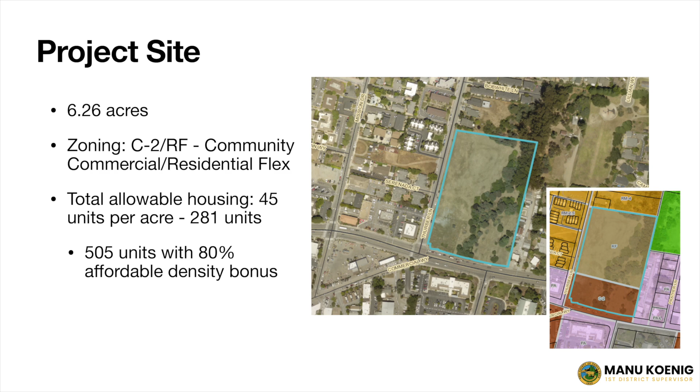It is not taking up Winkle Farm Park. You can see Winkle Farm Park off to the upper right. This property borders it roughly where the tree line is, and there's an urban arroyo that goes down the middle of the site that is roughly 2 acres.

The project's proposal includes 181 residential units, plus 2 managers units, for a total of 183. It includes 5 total buildings: 1 3-story building, 2 4-story buildings, and 2 5-story buildings, with renderings shown on the right. The project is proposed to be 100% affordable.

I can get into the complexity of what exactly that means, and there would be 273 parking spaces, or approximately 1.5 per unit.

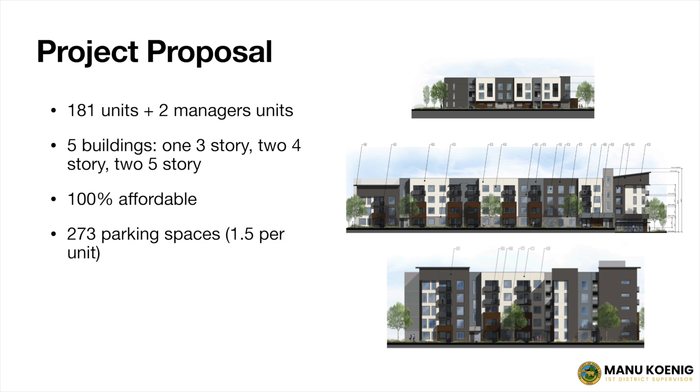The affordability calculations are a little complex. Basically, the project would be divided into 4 different income levels, all based on the area median income, which is about $105,000 per household.

So the project timeline so far, we actually do have more people than when this was first aired at a community meeting back on April 29th. The developer held a community meeting back then at the Congregational Church in Soquel. Saw many of you there.

The first formal plan submission to the county was actually very recently, on August 30th, and there were a few design changes between April and August. Then I started to hear from you at my office hours in September, so I started sending out communications September 13th to the Thurber Soquel Benson neighborhood, and then October 3rd to pretty much every email on my newsletter list, about 14,000 people. And here we are, October 10th at a community meeting.

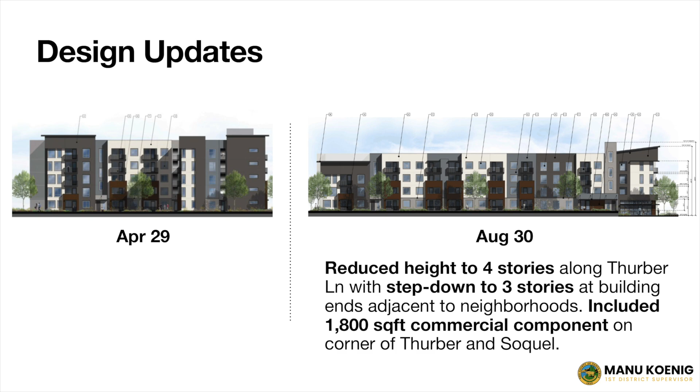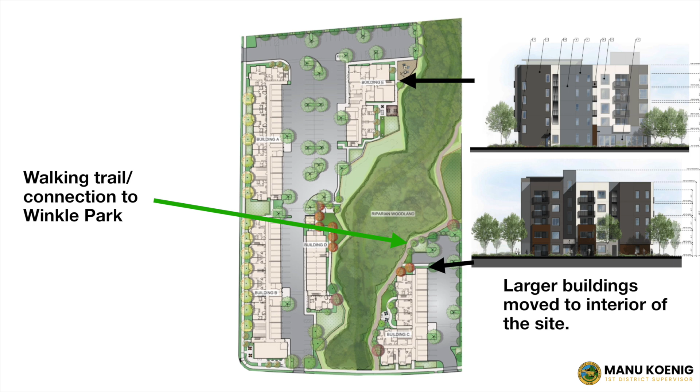Additionally, we're looking at putting in a walking trail connection to Winkle Park. The applicant and the county are talking about how we potentially do this, and who will ultimately manage this area, whether it's the county or the development itself. There are still 5-story buildings, as I mentioned, but they've been pushed more towards the internal part of the site so that they're not up against any particular existing buildings. They're also separated by parking lots from the edge of the site, again, to avoid excessive shadows or impact.

So those are some of the changes we've seen so far. I heard some snickers at adding a commercial space and a walking path, like it's no big deal. Why bother trying to integrate this project into the neighborhood? Well, I could say, look down the street. We've got a 9-acre affordable housing project there, and it's fenced off. If you're a member of the community, you don't get to interact with that 9 acres on Soquel at all. And so I would suggest that's not a particularly good way to have a project integrated into the neighborhood. So we can definitely do better than that.

So why are we even talking about projects of this size? Well, first let's review some of the basic numbers. You can't actually make this stuff up. I'm sure the idea of $3,000 a month for a 3-bedroom sounds high. The reality is the average rent in our community is $4,000 for a 2-bedroom.

Santa Cruz County has been named the least affordable housing market in the entire country 2 years in a row. We were just ahead of San Francisco a couple of years ago, and now we're a lot ahead of San Francisco. That means 70% of renters spend more than 30% of their gross income on rent. That's gross income compared to take-home pay. It's really more like they're spending more than half of all their take-home pay on rent.

The average home price in this neighborhood is $1.3 million. I'm sure if you just moved to the neighborhood, you feel that. And with a 20% down payment at today's interest rates, it would take a household income of over $400,000 to afford an average priced home in our community.

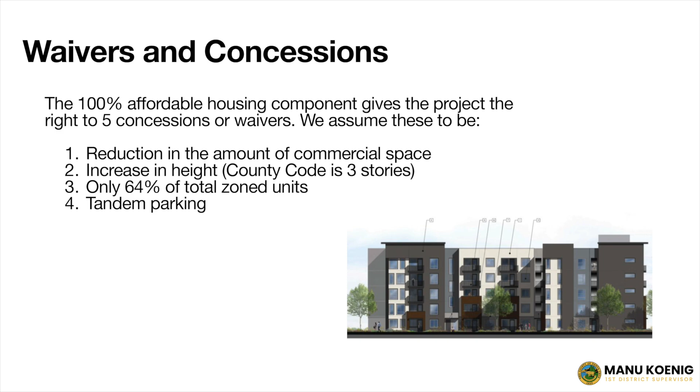So many of you said, let's just tell the state to pound sand - no way, we're not doing it. Sorry. Well, our City of Santa Cruz friends were a little bit ahead of us on this journey and tried that.

They tried that with the 831 Water Street project. This is at Water Street in North Branciforte. In October 2021, the Santa Cruz City Council rejected this project. They said, we don't like it. They found a couple of reasons, having to do with the stability of the slope and with the way the low-income units were distributed through these two buildings here. So they denied it.

A group called YIMBY threatened to sue them under state housing laws. Furthermore, the project reapplied under SB 35, that's the streamlining provision in state code, which basically reduces the amount of consideration the council could give it. So they ended up approving it just 2 months later.

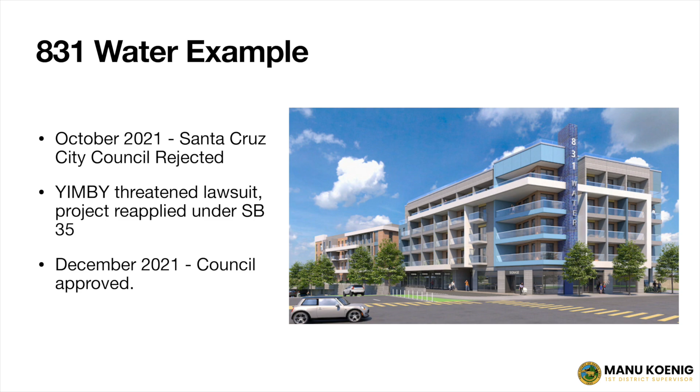Let's talk a little bit about why here, the RHNA allocations, how the zoning map is developed. A lot of you have reached out and said, we need housing in our community, but by all means, it's the wrong place. Put it downtown, put it in Santa Cruz, Capitola, Watsonville.

The reality is the state has said all of the above. Each one of us in a separate jurisdiction, the cities and the unincorporated county, we've all received allocations for the plan for new housing in the thousands.

City of Scotts Valley, 1,220 units they had a plan for. City of Santa Cruz, 3,736. Unincorporated Santa Cruz County, 4,634. City of Capitola, 1,336, which is significant because they only have about 10,000 houses. City of Watsonville, 2,053 units.

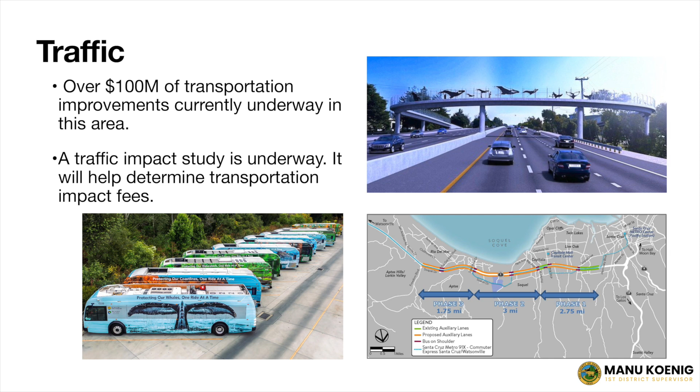That means building an auxiliary lane on Highway 1 so you'll be able to get on at the Soquel Drive exit and go all the way to 41st without ever exiting - you won't have to merge with existing traffic. And that project is being extended, as you've seen now - phase 2 down to State Park Drive is underway, and will be extended down to Freedom Boulevard, we hope. We're currently applying for money to build that segment through Aptos.

At the same time, we're going to work on Soquel Drive. Most of the impact you've seen right now is from the sidewalk gap closures - we just had a lot of holes in the sidewalk network, and those are being filled in. Sidewalks are extremely expensive, so we're happy for the state assistance - they're like $1 million a mile. We're also putting in buffered and protected bike lanes, green bike lanes on Soquel Drive to try to make it as safe as possible for people to ride.

Wherever possible, we're doing fully protected lanes with a barrier, the posts, and where the widths are just under regulation, we just have a foot or two of extra striping. We've also invested heavily in improving the bus network, and Soquel Drive is actually the best bus line in the county - it's most heavily used after the routes up to UCSC. That's why we're expanding to 15-minute service on Soquel Drive.

Now, one thing I truly believe will make a difference through this area is timed lights. We have a lot of lights really close together - Thurber, Winkle, Dover, Madison, and then you're at 41st. We're also looking at putting a right-hand turn lane from Soquel onto 41st. And the last stop sign on Soquel Drive at Robertson Road is being replaced with a stoplight so it can also be timed. They'll all actually know what the other one's doing, so they can all turn green at the same time and traffic can actually move.

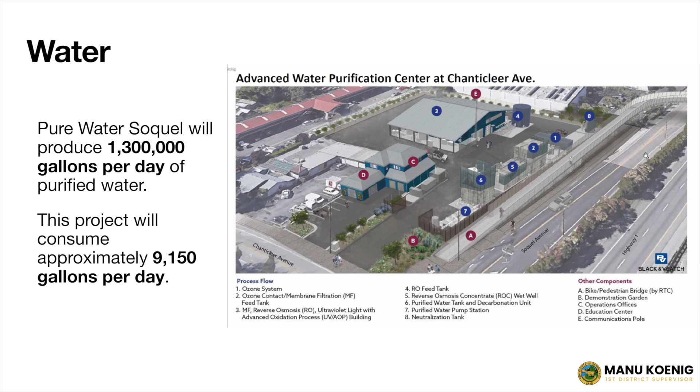And wait, there's more. Because when we had this discussion about water 10 years ago, the community said, first of all, we don't want desal, we'd rather see recycled water. That's what's happening. And furthermore, what about all that good water that flows out to the ocean in the winter when we have all that darn rain? Well, guess what? We're going to pump it into the aquifer too.

Santa Cruz Water Department and Soquel Creek, which basically rely all on surface water, San Lorenzo and the North Coast streams, have formed an agreement, interties everything with Soquel Creek Water District, which is all wells, pumping it all out of the ground, which is why we have a critically overdrafted basin here. They're now working together, and they're going to take the excess water in the winter and pump it into the ground for storage and use later.

And they are probably a year away from turning that on to production levels. They've done all the tests. We confirmed that the basin actually holds water when we pump water into it, that they can get it out effectively. And so between these two efforts, there is good reason to believe we'll have a stable water source going forward. We are also requiring monitoring of large wells throughout the county so that we know, particularly since some of the agriculture near the coast has aggravated this problem, and so we'll be keeping a closer eye on that.

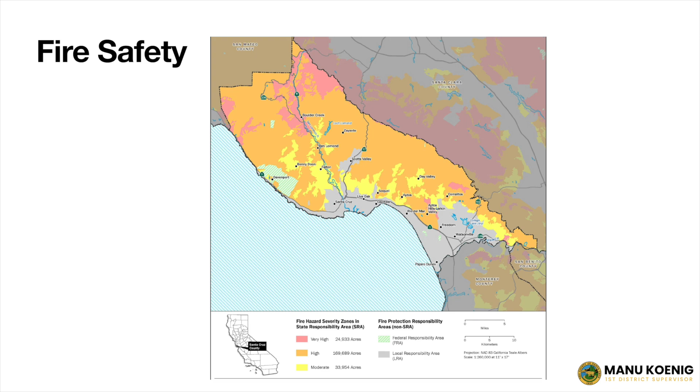So yes, there's a lot of fire risk out there, but this site that we're talking about is outside of it. Again, that's why sites like these in the urban area are the ones where we said, hey, if we have to put 4,634 units in this county, we should probably put them outside of severe fire zones.

I was asked, do we have enough capacity if Measure R fails and Central Fire doesn't get the money they're asking for? Would this project be denied? No. Measure R is about resilience for Central Fire. It's about getting Soquel Station out of the floodplain so they're capable of responding during disasters rather than being stuck in the station. It's about having larger stations that can hold more modern trucks. They do have enough equipment now, ladder trucks, to respond to a fire in a 5-story building.

Another question that came up is, will there be on-site security? I don't have a firm answer yet, but I imagine the 2 on-site managers would be considered the frontline defense there, and of course our sheriff's department. The sheriff's center is right across the highway.

5 stories above parking, so 6 stories in total. On 2.7 acres, 289 units, that's 107 units per acre. This project is 28.7 units per acre. They're not building over the green space, though they could—they could pipe that whole green space just as it's piped below Soquel Drive and up by Benson. You could pipe it and just build right over it.

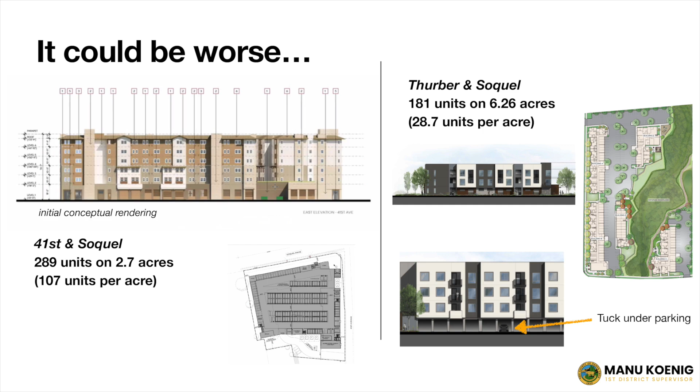Again, 500 plus units could potentially go on the site. So again, the current application has been deemed incomplete. We're still waiting for the traffic impact analysis, and we're still waiting for a review of the biotic report for the CEQA analysis, the Environmental Quality Act analysis. We don't expect a complete application until at least the end of the year, possibly later.

Once we have a complete application, this will go to the Planning Commission for a public hearing, and then if it's appealed, it would go to the Board of Supervisors, where I would vote on it. Now, even that—say it doesn't automatically go to the Board of Supervisors. 41st and Soquel is applying under a state law, ministerial approval process. Ministerial means no discretionary review required—not the Planning Commission, not the Board of Supervisors. If it meets the rules, it shall be approved.

Well, there is a point in having this meeting, and we're actually getting to it, which is—first of all, my commitment was just to hear any feedback you have on ways to make this project better. Now, we're getting to questions, and because we're going to be forming a queue for questions, think about getting up. We only have one mic, so we can't run it to you guys.

My commitment to you is to do whatever is possible to improve this project, to communicate with you every time there are updates about the project, to use any park impact fees we have directly in this area with a focus on Lincoln Park, to design and propose a permanent parking program for Live Oak because I know parking overflow is an issue, and to request that our state representatives improve our housing laws. With that, I'm open to any questions or suggestions.